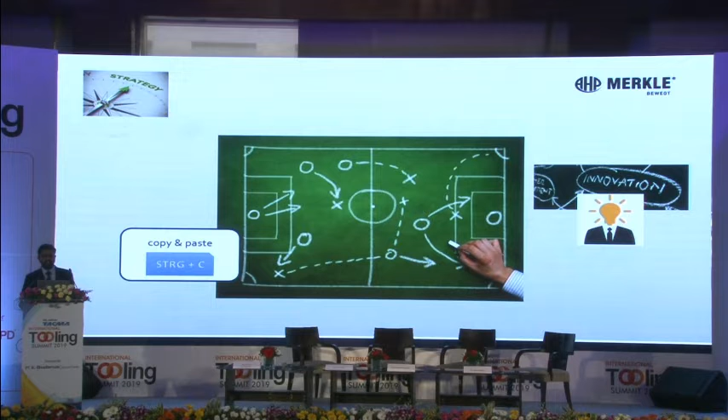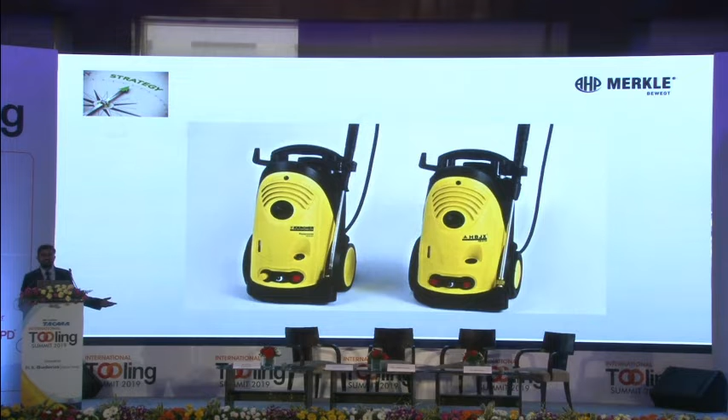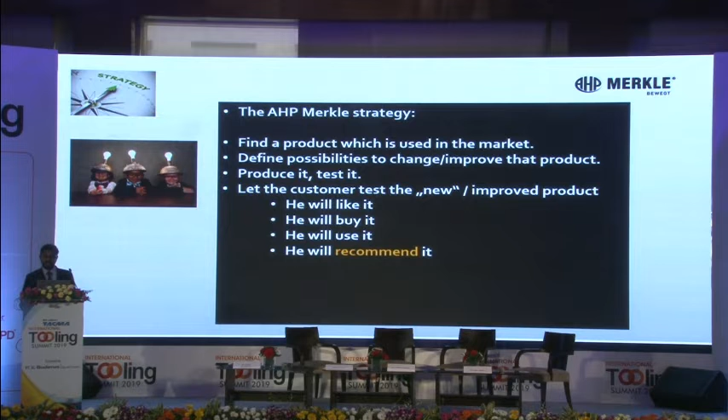What's the common strategy that we all, or the human tendency, follow? Whatever is successful in the market, we all have an idea to copy it, right? Don't we? And the end result is both the products look the same. We at AHP Merkle try to think outside the box every time we see an application or a solution. Find a product which is used in the market, define possibilities to change or improve that product. Produce it, test it, let the customer test the new and improved product. He will like it, he will buy it, he will use it, he will recommend it. That's the most important factor. He has to buy it because it's better. He has to buy it because the advantage is that big that he wants this product.

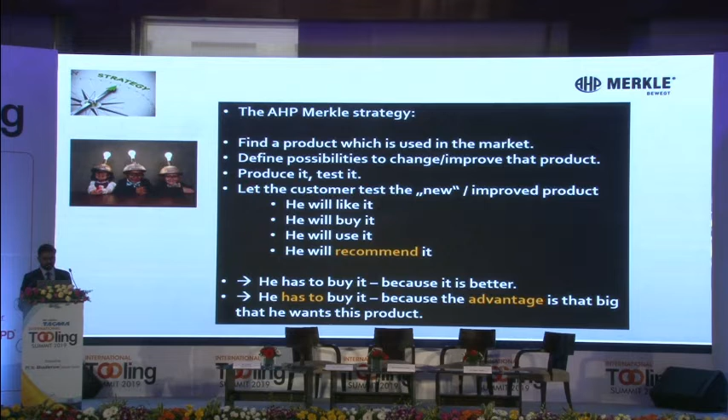Now, how do we do this? The piston rod, which is an integral part of the cylinder, is hardened and ground. Like you see in the animation, the hardness is anywhere between 0.5 to 2.5 mm depth, depending on the diameter of the cylinder. As far as my knowledge, most of the European cylinders as well do not have this - it's just normal hardening up to 64 HRC. Whereas at AHP Merkle, we do this, and also the plating is done to ensure smooth movement between the seals, ID of the seals, and OD of the piston rod.

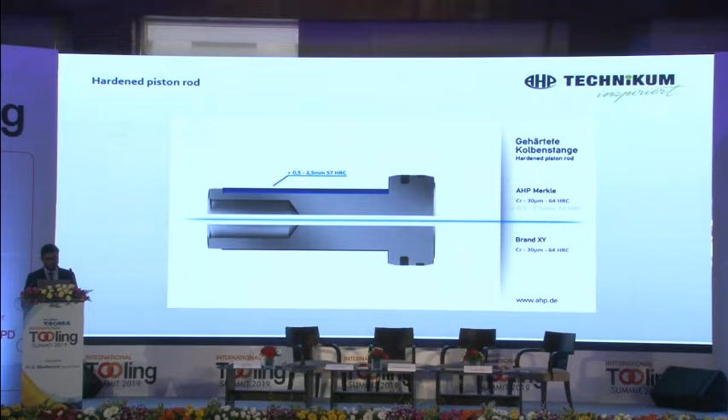How does this help? Sorry. Yeah.

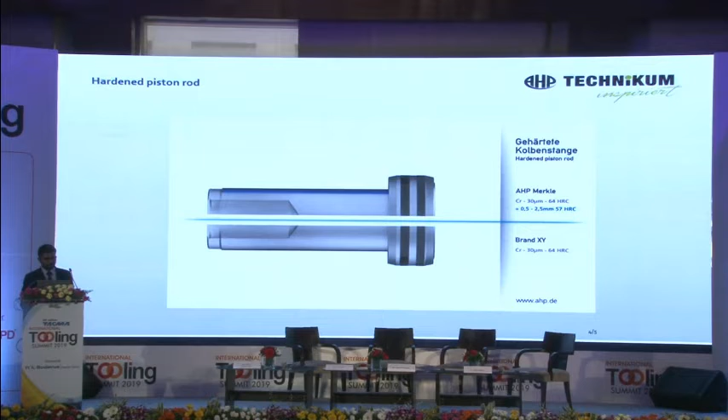So what this ensures is that there is no external mechanical damage to the piston. This ensures that there will not be any clearance between the seals and the piston rod, thus helping to overcome the problems of leakages.

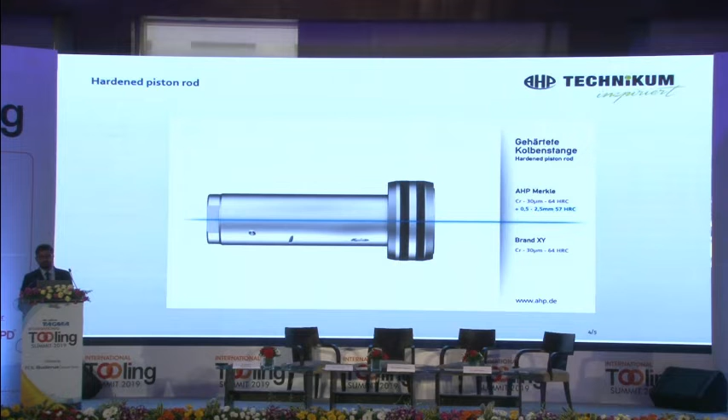Roller burnishing. As a part of our regular process, all our cylinder housings go through the roller burnishing, thus ensuring the roughness value going down and increasing the surface finish.

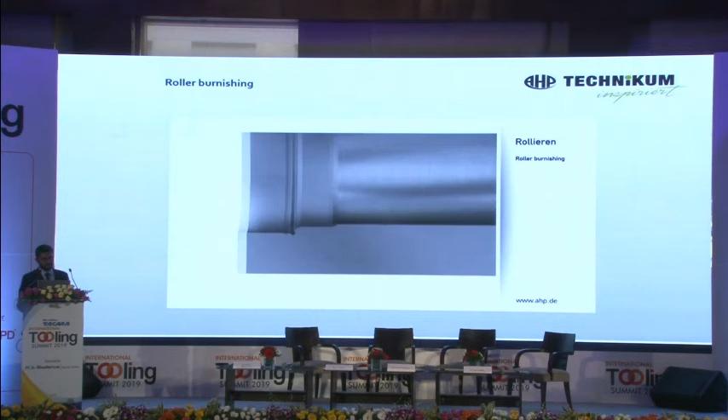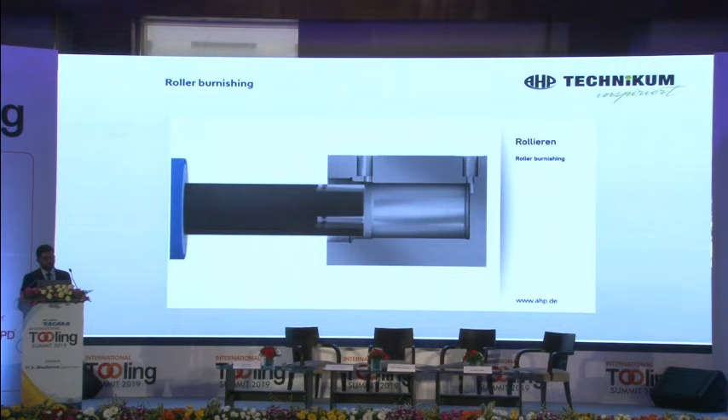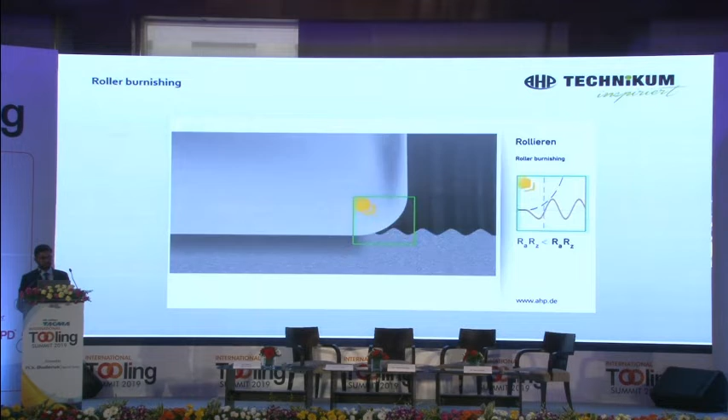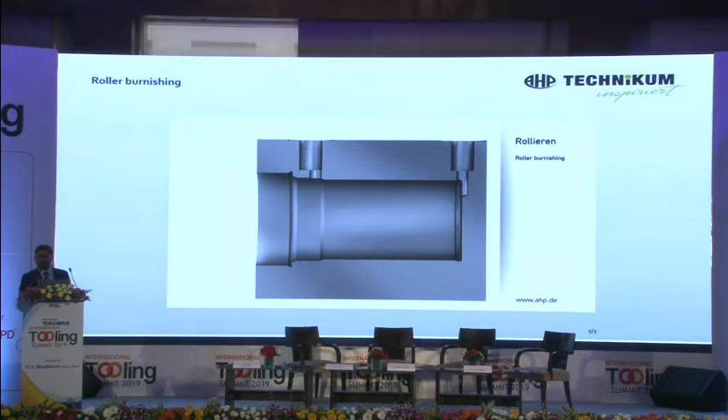Yeah, that's the enlarged view. The housing needs to be perfectly finished and smooth because the seals on the piston rod always guide on this.

Now I talk about a special development, cushioning of the cylinder. The standard cushioning of the cylinder is done by an adjusting screw. The chart on your screen, the red line on the graph shows without cushioning. The blue line shows the standard cushioning.

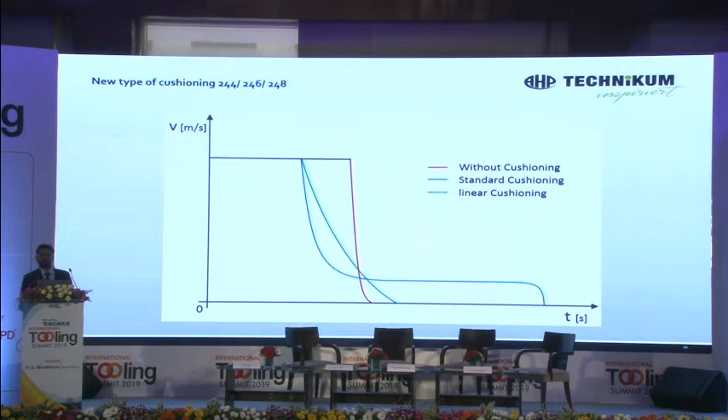This will reduce the speed of your cylinder. The new linear cushioning gradually slows down the piston rod, ensuring there is no effect on the cycle time. And this new cushioning is auto-adjustable, does not require any screws, so no mistake caused by wrong adjustments.

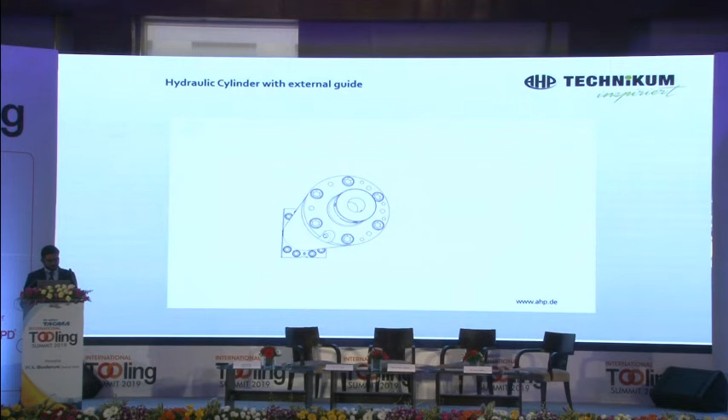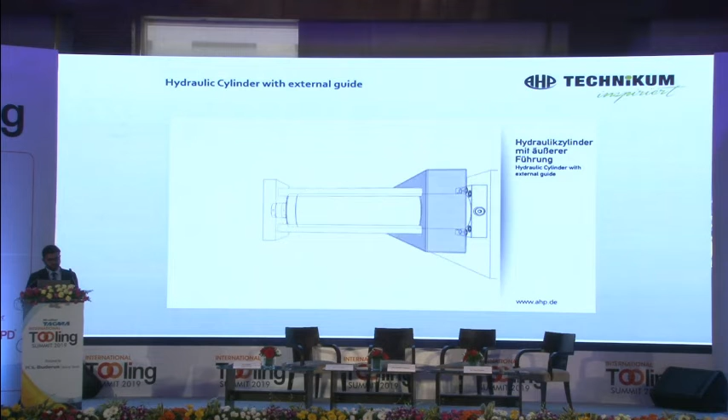Now, another special solution that we have developed for die casting molds. We have developed a cylinder with external guides. What can be observed in the animation is that the core movement is on the external of the cylinder. The guiding takes place on the cylinder.

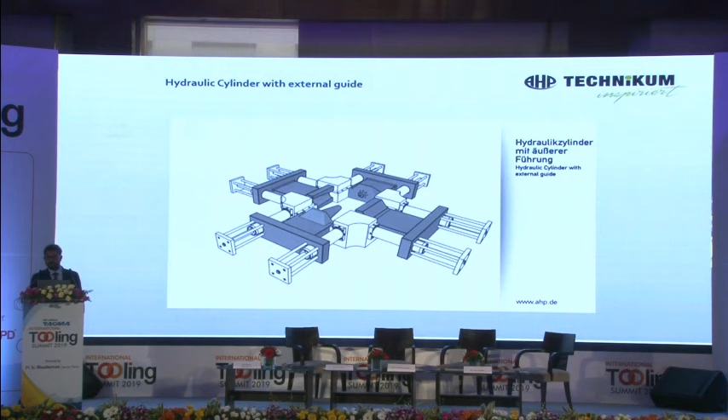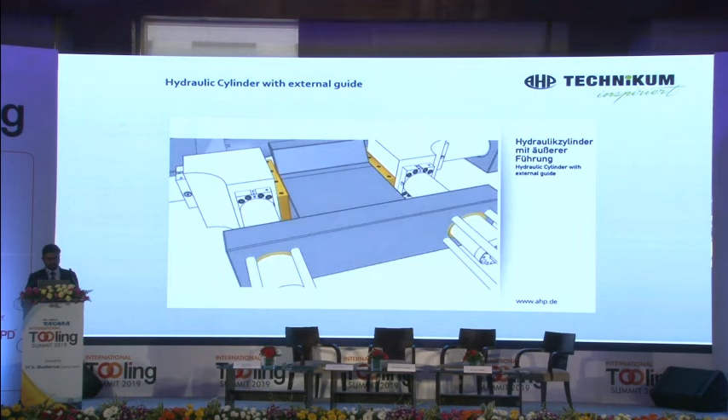There we see. The image on the right shows the conventional way of operating the cylinder.

The new AHP solution ensures that your mold size reduces, thus reduction in usage of steel, and better to handle.

So maintenance becomes easier, loading and unloading of the mold is much more easier.

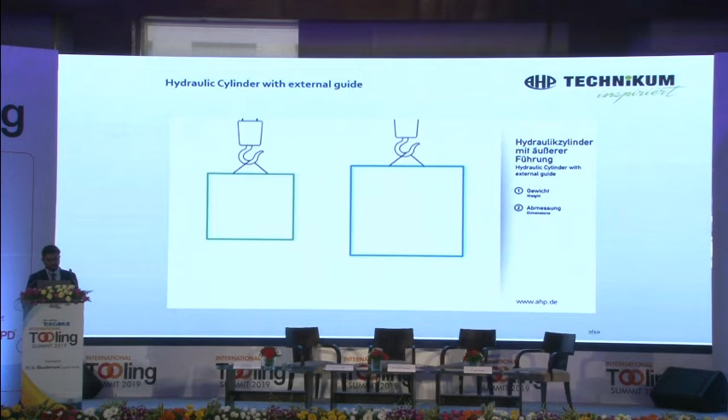Now we talk about the handling and the maintenance. Let's see an illustration example showing the dismantling of a conventional system. Here, the cylinder has to be removed, and then the core can be removed.

Whereas in the case of AHP Merkle, we see it becomes very easy. This is a big advantage for big die casting molds.

And more often than not, we know that side core is a challenging application because after the aluminum sets down, it's always a challenge to pull out the core. So more often than not, we tend to use a larger bore diameter.

Whereas in this case, we can see that the two cylinders are mounted in an inverse direction, so we use the actual pushing force of the cylinder to pull out the core.

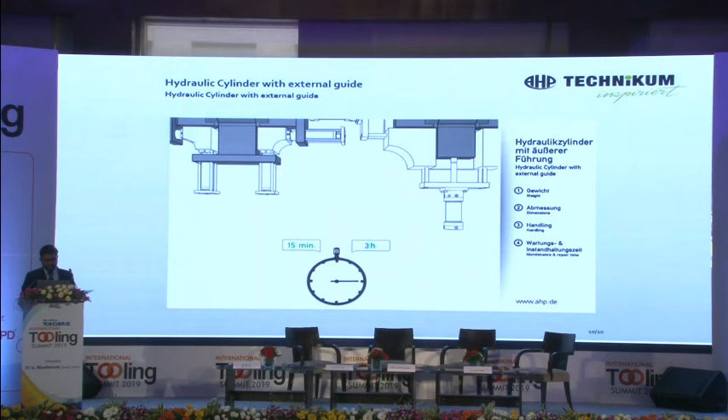Now my next core pull unit, I would be talking about it. If I had asked people what they wanted, they would have said faster horses. Now that goes well with the HZF cylinder.

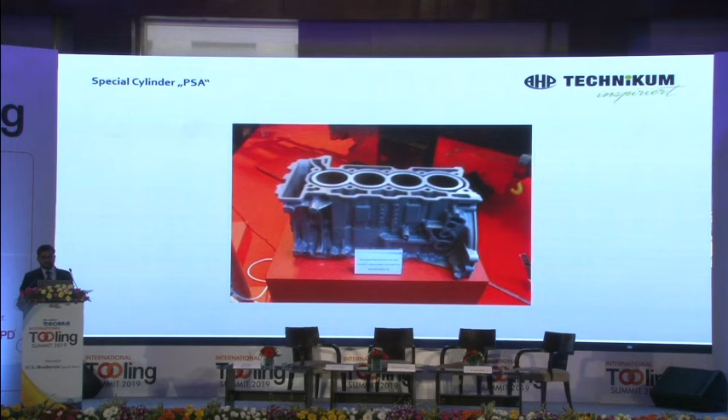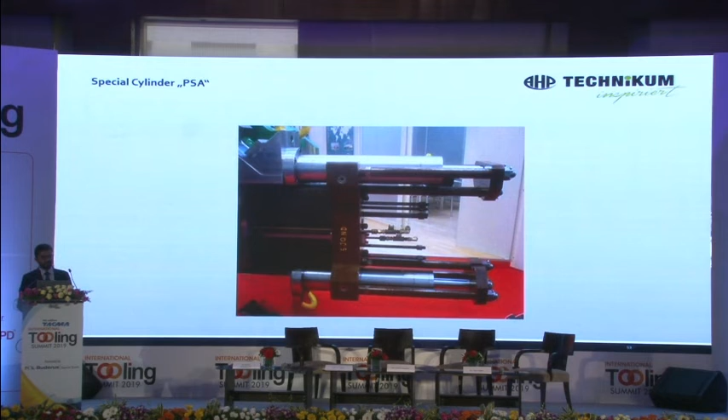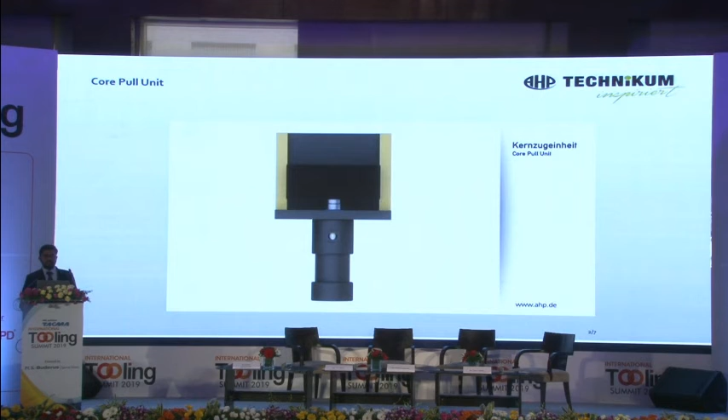One of the most interesting products is the core pull unit. As I said, the pushing force of the cylinder is always more than the pulling force, because the hydraulic oil gets the larger contact area for it to create the force.

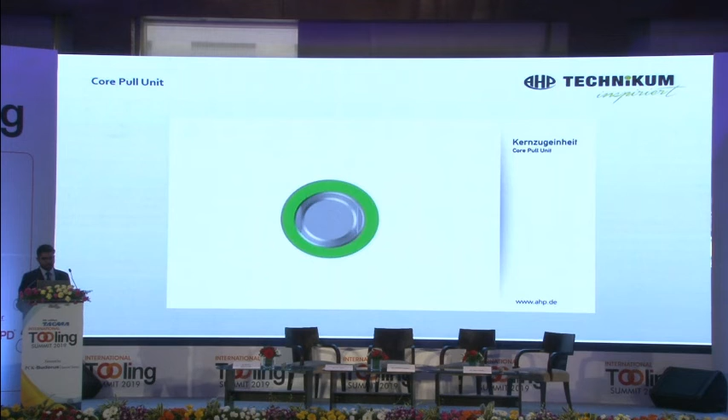So during the pushing force, the force is 1.6 times more than the pulling. Yeah.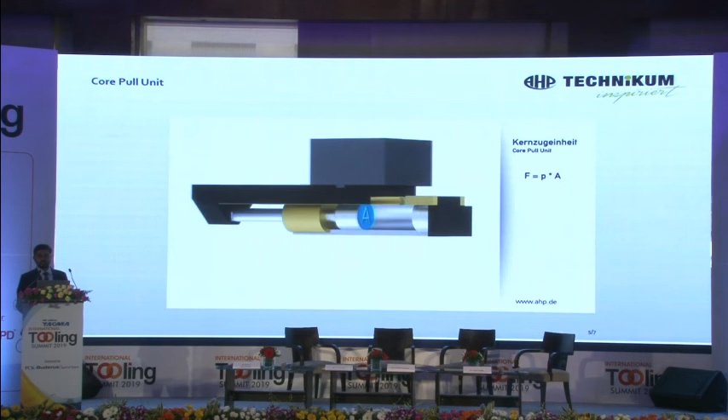So that's how it goes. We are using the pushing force to pull out the core, thus makes the cylinder compact, and even you can go for the actual piston diameter that's required.

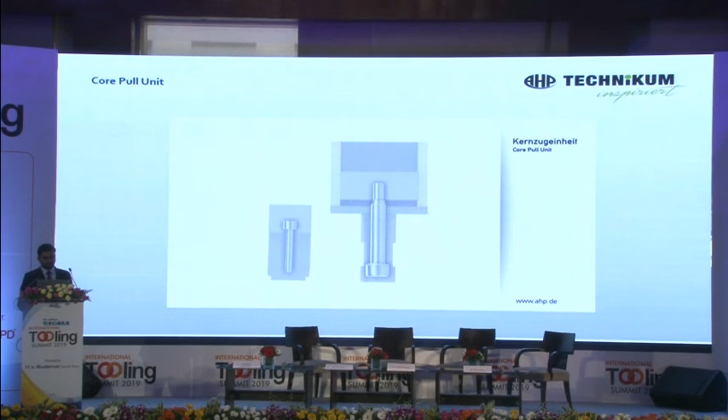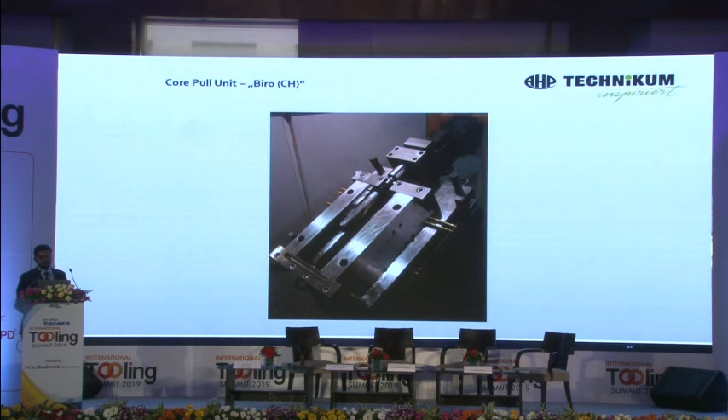That was the final product, handbrake for Audi A4. That shows the mold installed with the core pull unit.

We also developed cylinders with cooling for squeeze pin applications, because we all know that for squeeze pin applications, the temperatures can go really high and can damage the seals. So we have developed this cylinder where the cooling can be provided near the seals, ensuring that the seals don't get overheated and damaged.

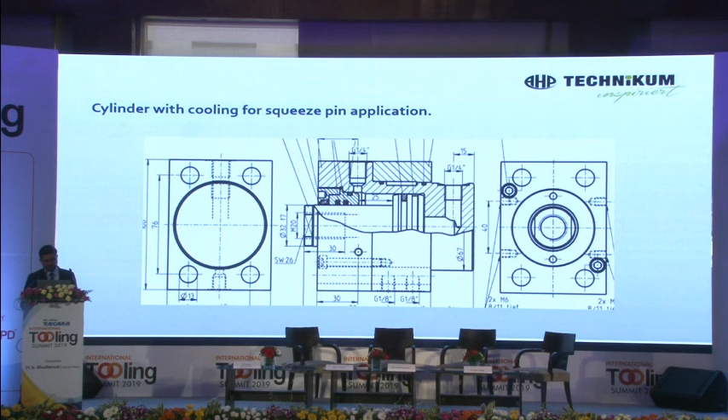So we want to drive our customers' success. What about you? Could this be an idea for your company? To improve the standard of your product, instead of waiting to see what your competitors are doing. Be active, start, dominate the market, define the speed and quality level by your own.

Innovation is no guarantee not to fail, but without any innovation, the fail will be guaranteed. We all know Madhu Group since 1984 and are partners with AHP Merkle.